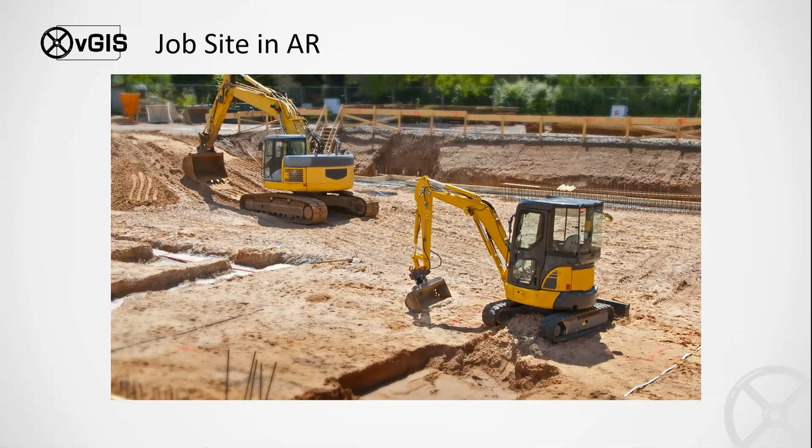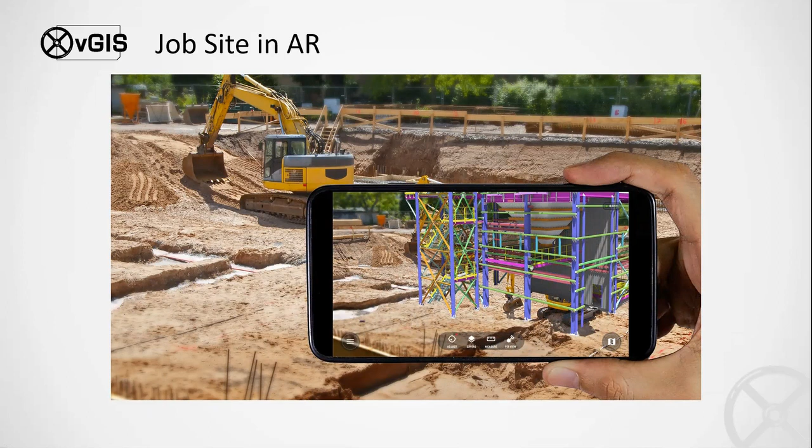The main objective of the system is to visualize the digital twin in a novel way. We want to take anything that exists only in digital form, or something that exists already under the surface of the road and you cannot see, and then bring those visuals to life through augmented and mixed reality.

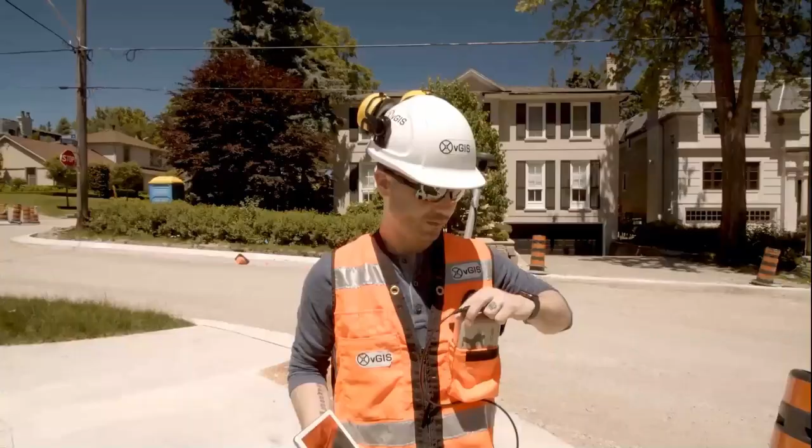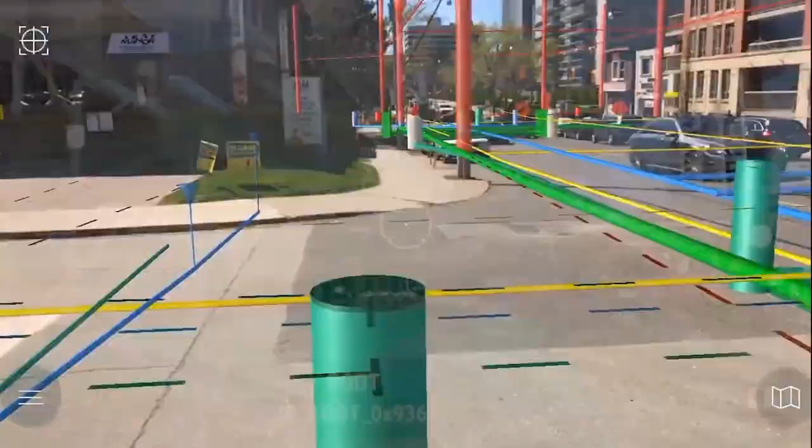In doing so, we rely on multiple tools. We are platform agnostic in every possible sense. We work with Microsoft HoloLens, tablets and phones, iOS and Android, and we bring digital twin in the form of GIS data - that's what you see on the screen right now - or BIM data, or even reality capture data.

If you're wondering what's the main purpose of the system, it can be described as reducing reliance on 2D maps. 2D maps, schematics, and blueprints have their place in the world, but the biggest issue with 2D maps is that the process of reading maps is time-consuming and error-prone. We believe that by replacing it with a natural view of 3D visuals, we can improve the perception, remove some of the mistakes that people commonly make in the field, and help shorten the time it takes to get oriented in space.

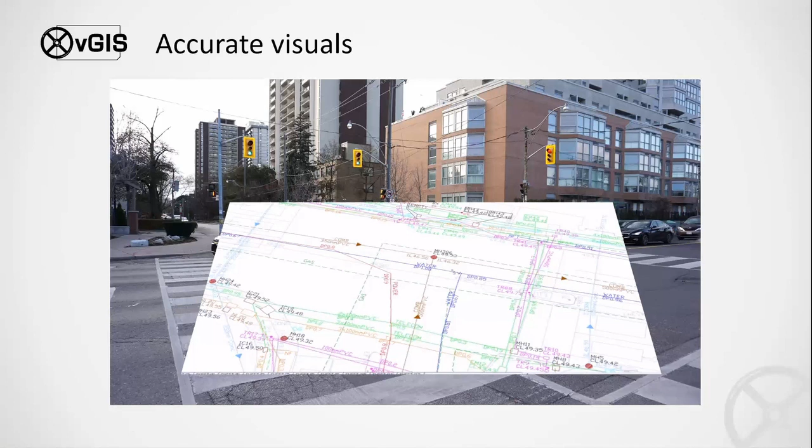As a result, we can bring visuals such as BIM, for example, and place a building to be constructed in the accurate location using mixed reality. That BIM information can come directly from sources such as BIM 360, Bentley iTwin services, native BIM files such as IFC and DWG, and then you can visualize it with high accuracy of up to one centimeter on site.

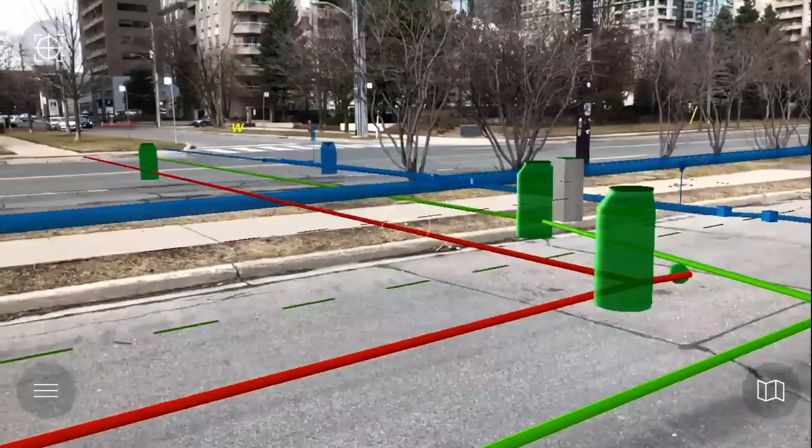In addition to BIM, you can work with GIS data. This is an example of what our GIS data looks like in vGIS. We consume native URLs from Esri, we consume points and lines, and on the fly convert them into 3D visuals based on the client specs. The model is built automatically by our system in the background in real time, so all the color coding, symbology, different sizes and shapes are applied dynamically based on your data and the attributes within your data set. So as your data changes, you don't need to build a new model by hand - our system will do it for you.

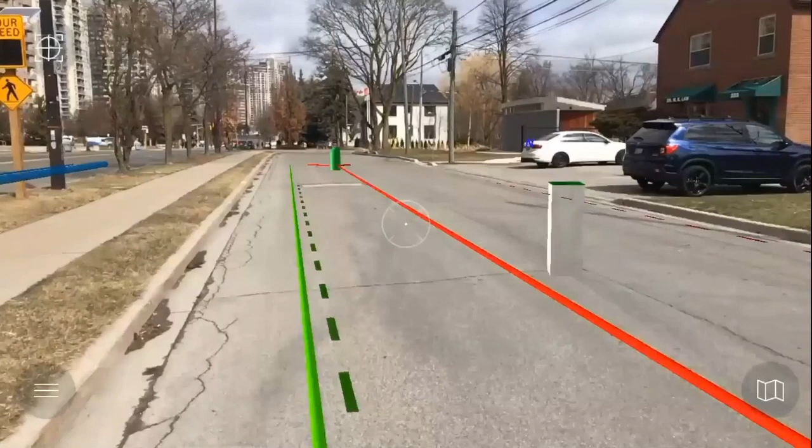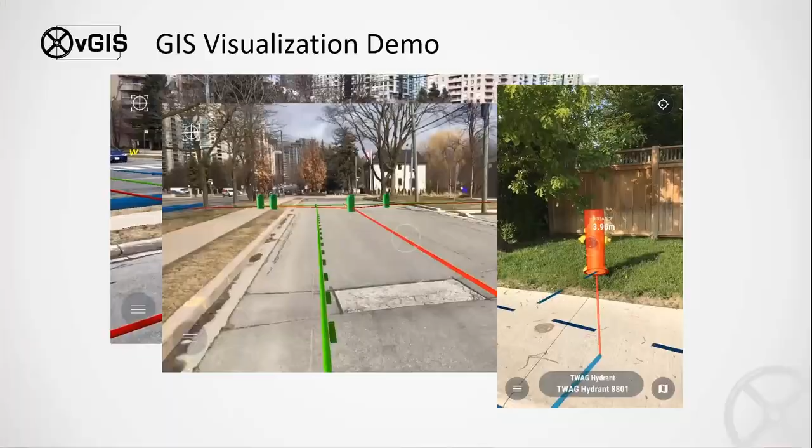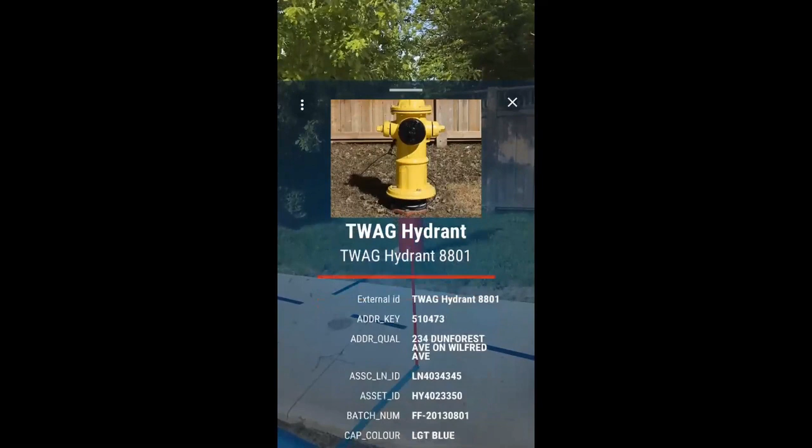Efficient data management is built into the system. So if you're walking in vGIS, it will dynamically preload data in the distance and display it as you keep moving in one direction. You have access to all the attributes within your data set, so by tapping on the digital twin, you can pull up additional information about that object. And if you work with an Esri backend, you can even modify that information directly in the field to correct different attributes.

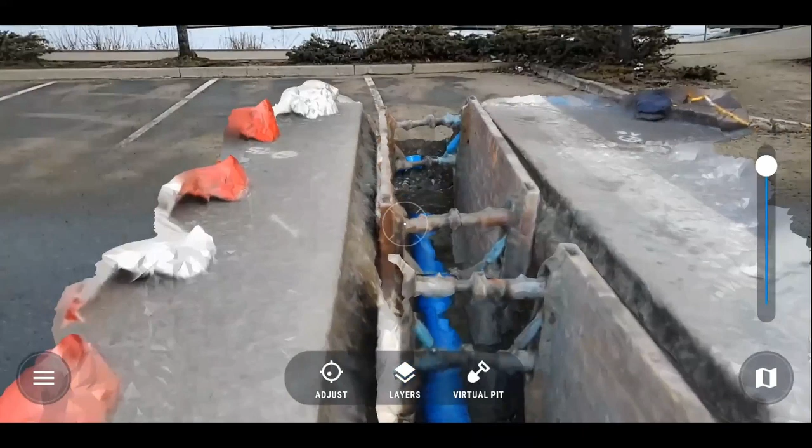Another aspect of our system is presentation of reality capture. Reality mesh, or point cloud converted into reality mesh, can be placed in augmented reality or mixed reality view with centimeter level accuracy. So if you had a previously excavated place, you can time travel essentially by going back to the site and see what the excavated trench looked like long after it was filled.

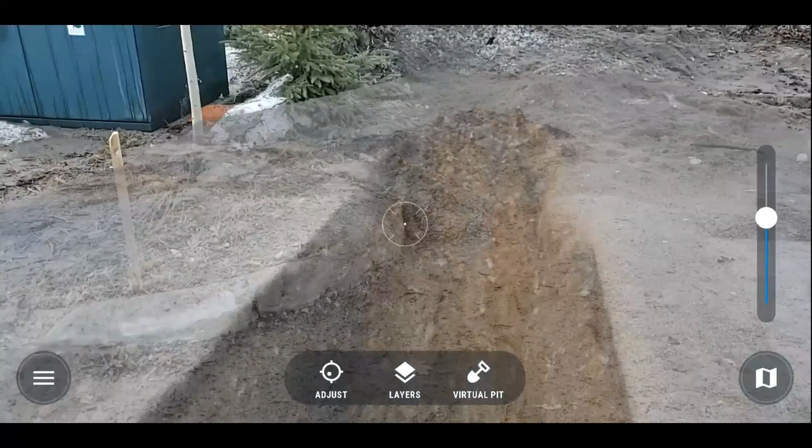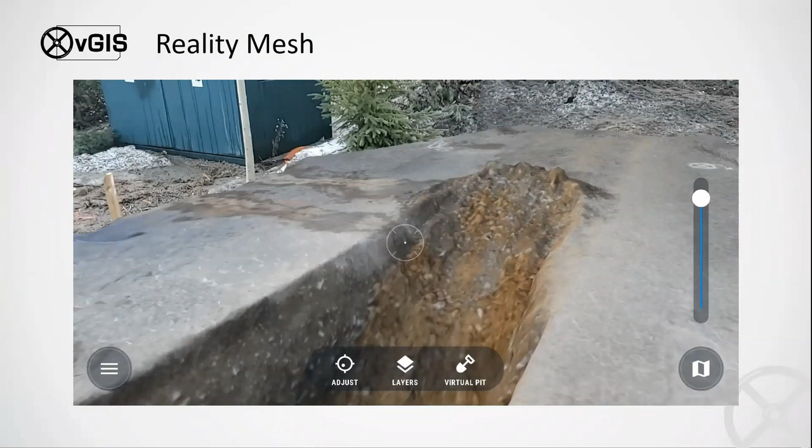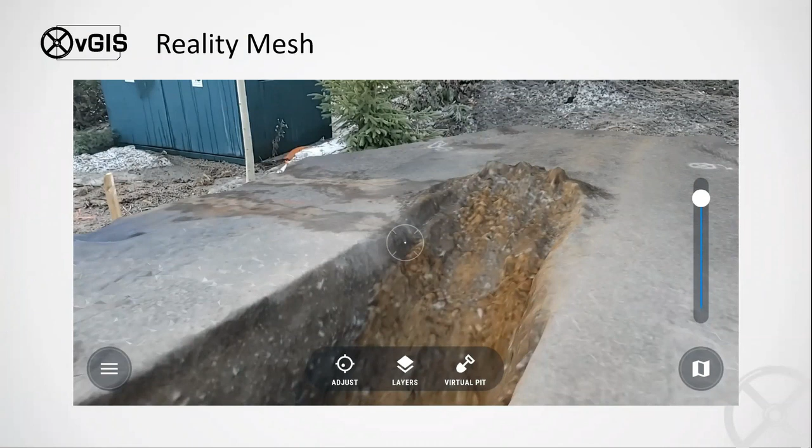This can be used in conjunction with actual excavations, or with construction projects where you can capture work in progress and then refer to different stages of construction. The best part is that this component of VGIS allows you to bring your own reality capture - if you work with tools such as Bentley or Esri, you can bring reality capture from those tools. If you don't have access to reality capture capabilities at the moment, VGIS has reality capture built in. You can simply use your phone and scan the ground, nothing else, and VGIS will convert that video stream into a 3D model, georeferenced, and that model will be available to the entire organization to see.

VGIS is currently the only system on the market that can take data from multiple data sources at once, from multiple, often incompatible formats, and combine the data on the fly in real time without much delay into unified AR views presented on the device.

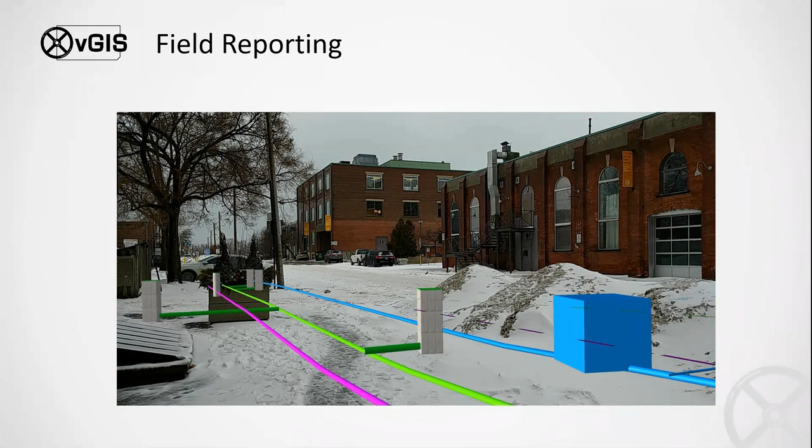Displaying data in AR is only half the equation. We also understand that you need to be able to do something with that data. Our system has workflows that allow you to facilitate bidirectional communication with your teammates. So if you notice a discrepancy, you can report on that discrepancy in vGIS, and when you report on it, the recipient will receive the exact location of where the report was taken, which way the person was facing, what they saw, and you can take necessary corrective actions based on the report from somebody in the field.

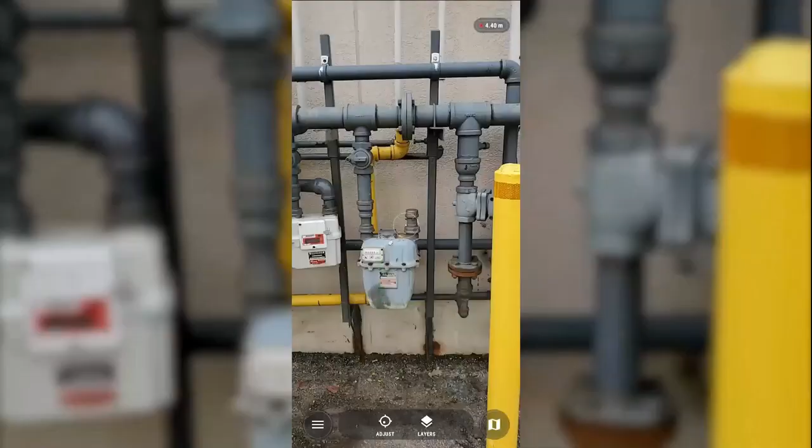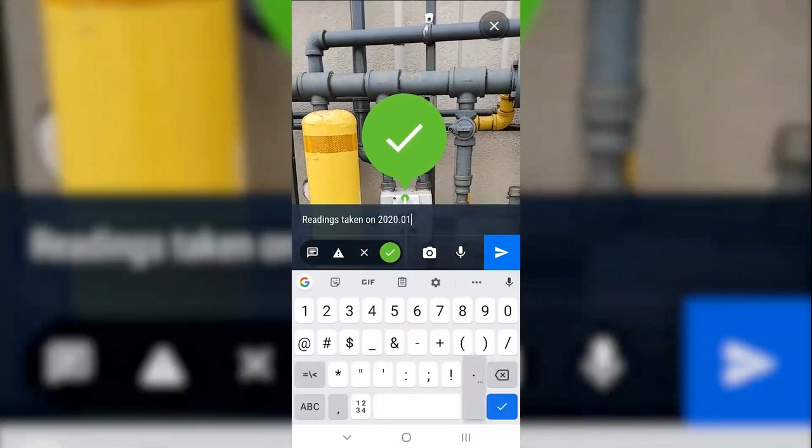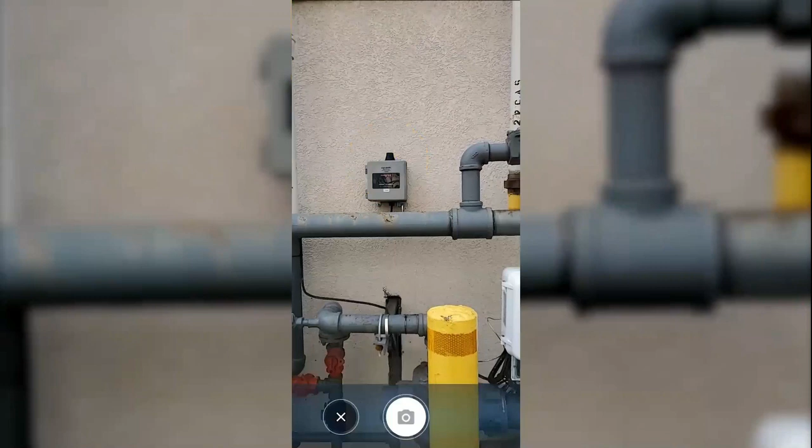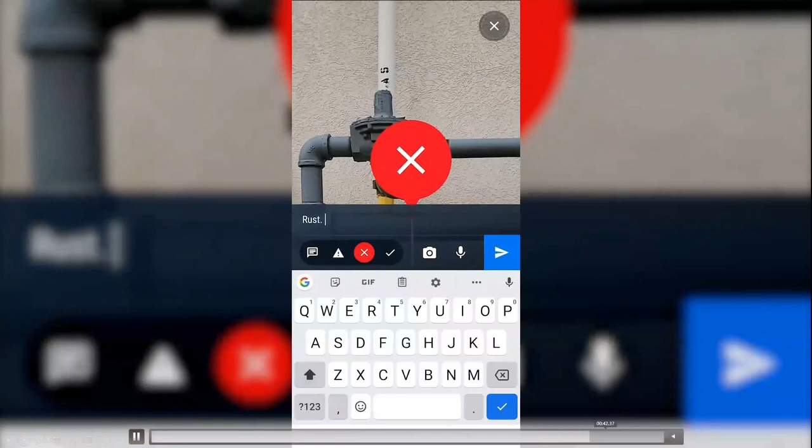You can also use virtual tags to label objects in space. This is very useful if you're going through construction projects and identify spatially referenced problems, like a rusty pipe or damaged object, then you can label that object. You can associate tags with the digital twin, and from the backend it can be exported as a fully linked relationship, so you can create job requests or work tickets based on that. The best part is that these visuals remain in space after you leave the job site, for other people to see. If you label something in the field and I come back a month later, I will be able to see all the same tags that you left for me.

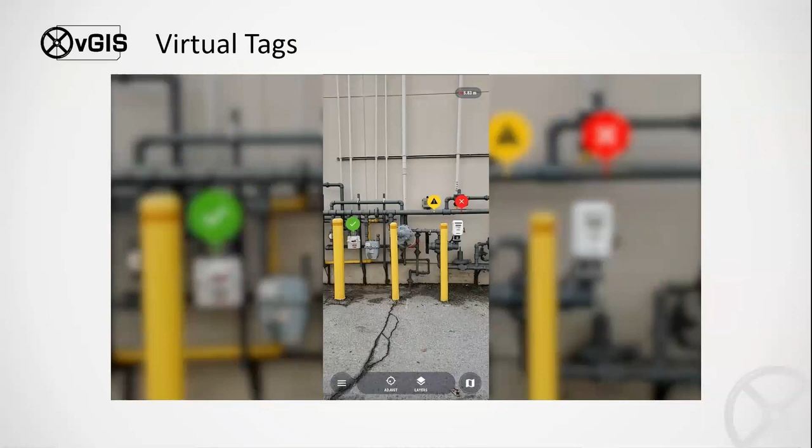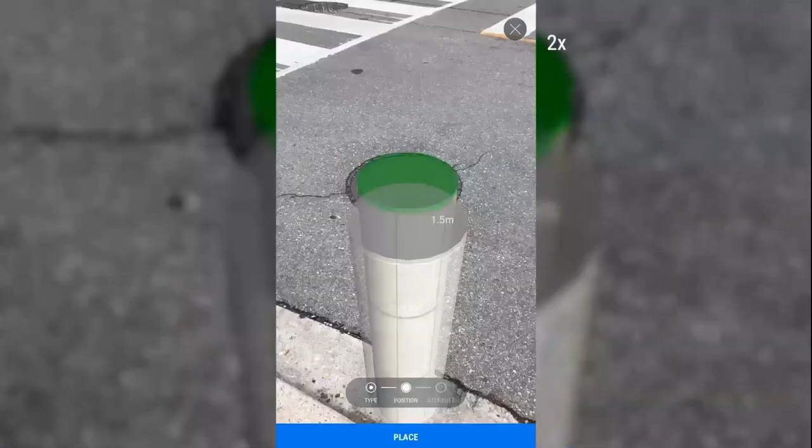vGIS comes with data collection capabilities. We are able to collect points, and shortly lines and polygons, at survey grade accuracy using GNSS or without GNSS, so you can use it as an AR-based data collection tool.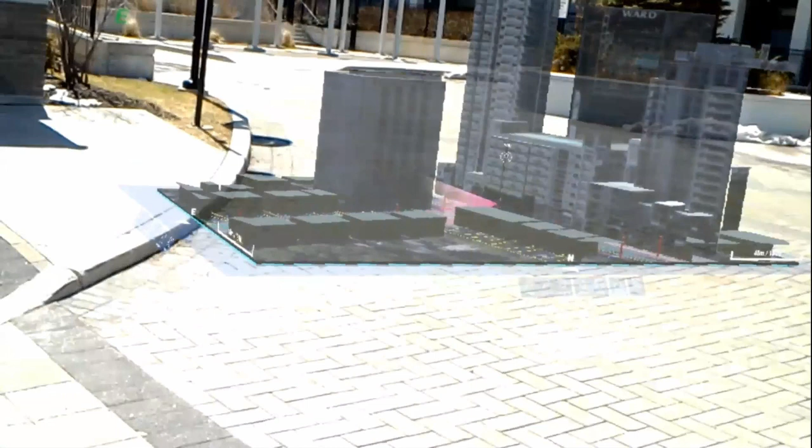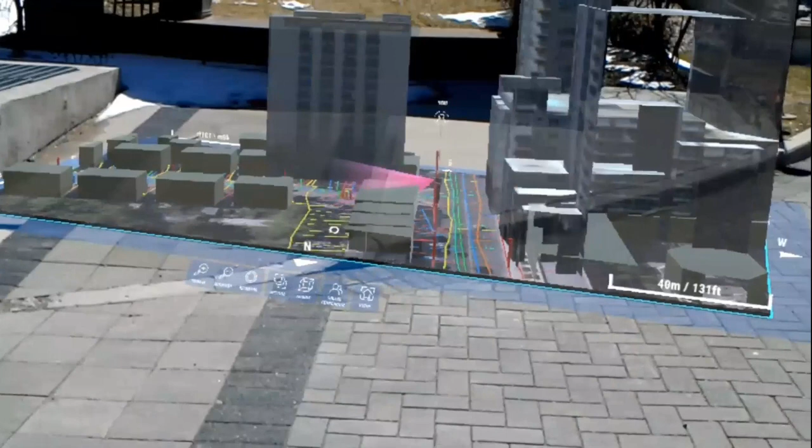The system, if used with HoloLens, also allows you to zoom out from your location and see yourself in real time on a holographic map with all the GIS features superimposed around you. That map looks and feels real, so it feels like you can touch it, and it gives you a great understanding of your surrounding area.

That view can be broadcast across devices, and if you need somebody to guide you through an issue, you can simply share your screen. They will be able to see what you see in real time, with physical world and holographic overlays combined. Because you can maintain two-way communication in that web view, you will be able to receive real-time guidance.

During the times of COVID, this becomes a very useful feature, because not everybody can be in the field all at once. Having somebody on site walking around and showing AR overlays in real time, changing transparency, doing cross-section planes, while the rest of the team watches over the web conferencing solution, is very useful.

We have approximately 100 clients globally, including many construction companies such as John Holland, Skanska, and Atkins, among others. Oil and gas companies, municipalities, public utilities, the United States Army Corps of Engineers, and the United States Air Force are among our clients.

The use cases we can identify for such a solution are as follows. First, it enables the connected worker to collaborate with your data in real time. As you accumulate BIM and GIS data, the system lets you use the same data you already have in a novel way.

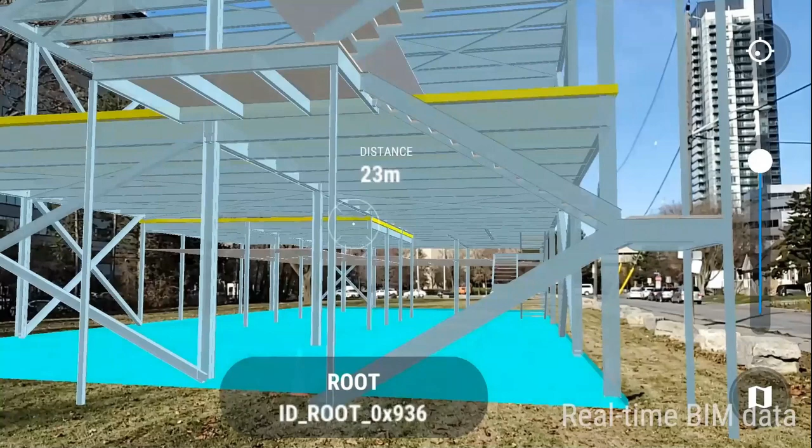We can support multiple devices, from Microsoft HoloLens to iOS and Android, so you can use any device suitable for a specific job, and optimize your deployment for a specific application, whether that's engineering or traditional maintenance work. Among the use cases is, of course, digital twin visualization.

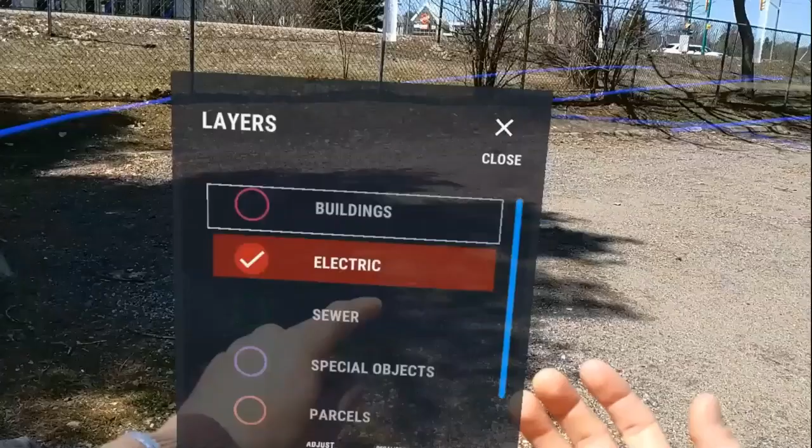That helps you understand structures and proposed construction before you start building anything. It can also be used for design reviews. If you're using HoloLens, I can remain hands-free to do my job, and see and visualize different elements in space in real time, so I can see what those towers, for example, will look like once everything is built, and how they blend into the neighborhood.

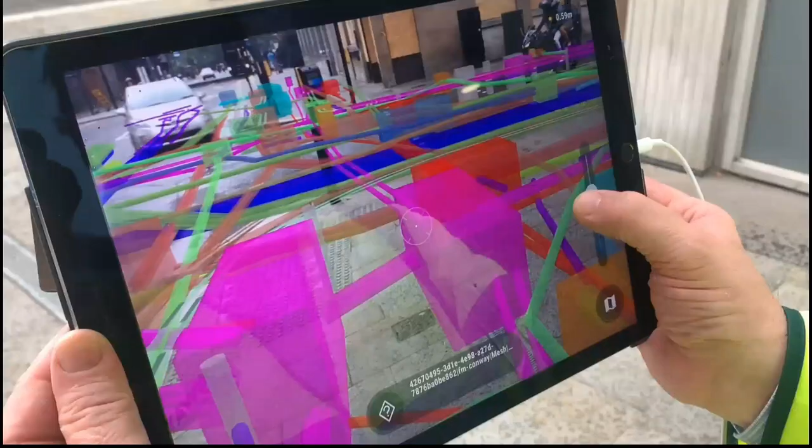Subsurface utility visualization is the key. If you have a really complex project, you're relocating utilities, or you're trying to visualize existing utilities, then it's a very useful tool that's been deployed by many companies in that capacity.

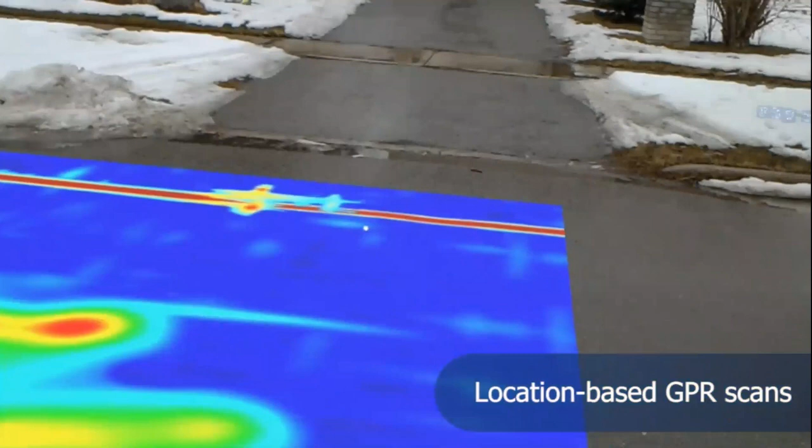We are also capable of visualizing GPR scans, and our LinkedIn profile has a very good video that shows how to do it in real time.

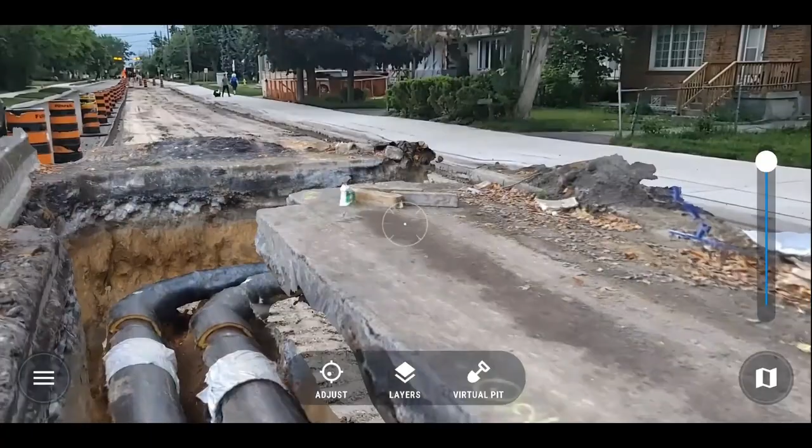And at this point, I want to open the floor to your questions.

So, Kent, looks like you have a question.

Hey, Alex. My name's Kent Groh. I'm a professional land surveyor, and this is absolutely amazing. I'm curious, this would probably be a really simple application for it, but for a boundary surveyor, let's say, could they incorporate this technology into boundary surveying? Once property boundaries are established, could you use the technology to literally see the property line while wearing the glasses, let's say, and using the tablet? Could you see the property line in relation to the physical attributes in the field?

Yes, you can. It's probably one of the easiest visualizations for us to do. And in fact, we work with Singapore Land Authority and a few other companies that use it in that capacity. Not strictly in that capacity, because they use it for other things as well, but that's something that can definitely be done. Our system has understanding of different terrains.